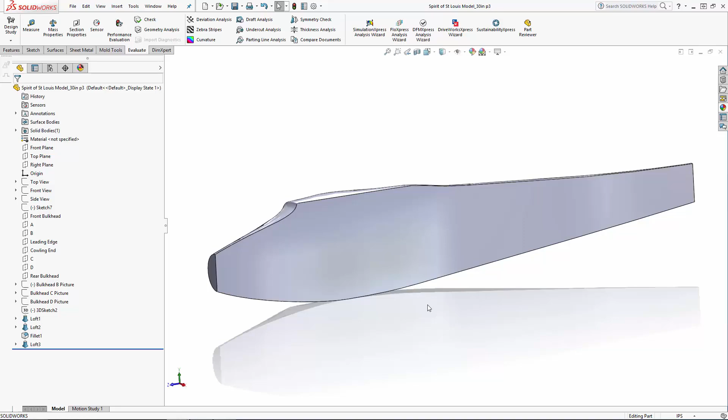Let's split this body into 3 parts. We can do this with a simple line sketch. So let's sketch on the side face of the fuselage, and I'll just sketch 2 vertical lines, one snapped where the cowling terminates and another dimensioned 4.875 inches from the first line.

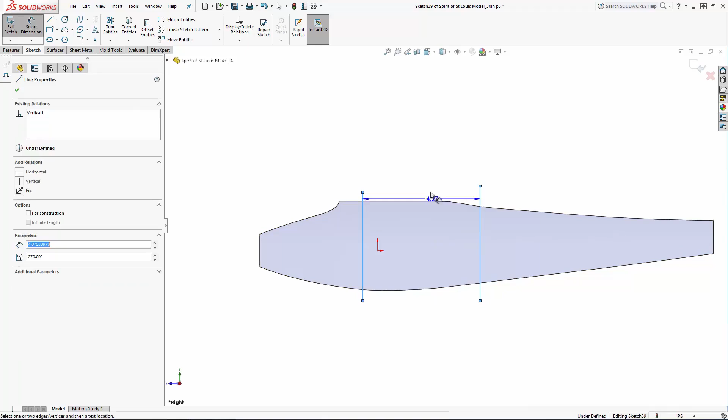With the sketch highlighted, navigate to Insert, Features, Split, and check the boxes next to the bodies you'd like to split. And we'll make sure the Consume Cut Bodies option is not checked.

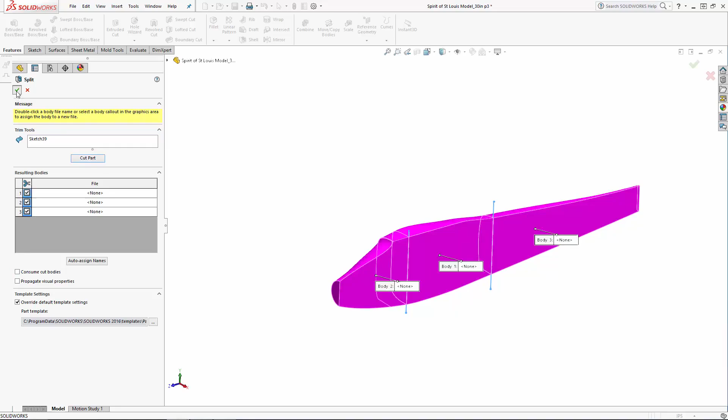Now we can hollow out the center body using the Shell tool. Let's hide our other 2 bodies and navigate to the Shell tool in the Command Manager. I'm going to set a wall thickness of 1/8 of an inch, and on the model select the faces I'd like to remove. In this case, the 3 flat faces. And hit the green check mark to complete the operation.

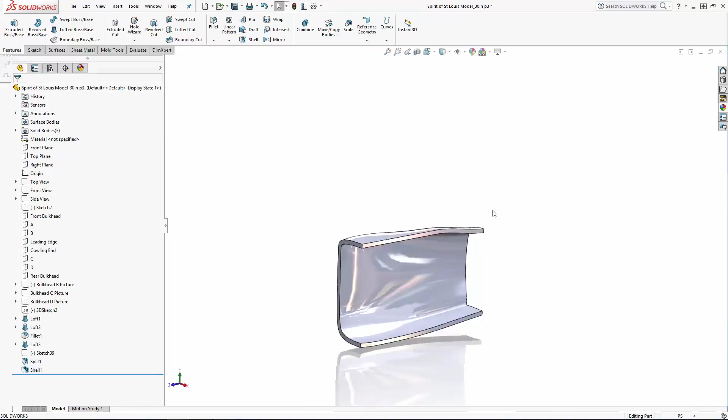Now let's recombine the bodies by going to Insert, Features, Combine, or just select the Combine tool in the Command Manager. I'll ensure the Add option is selected under Operation Type. Select my 3 bodies and click on the green check mark to combine the bodies.

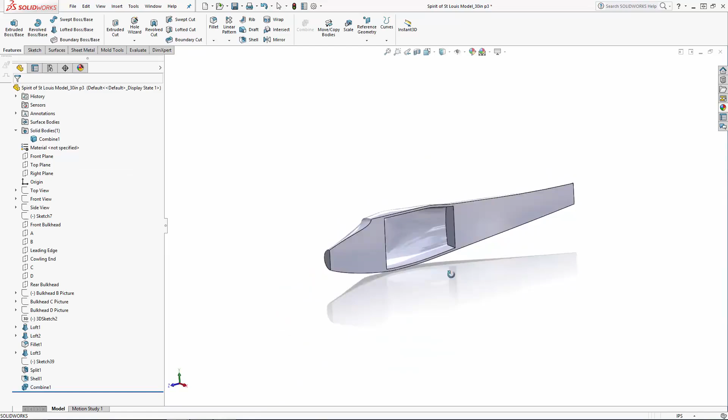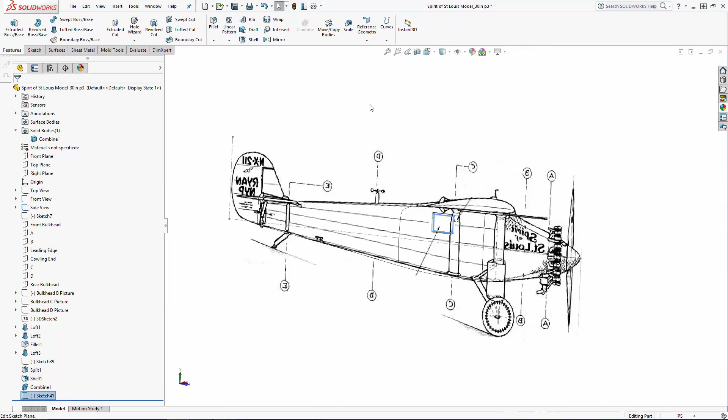Now let's cut out our window using a sketch on the right plane. I'm going to unhide our side view image to sketch on top of and sketch a simple rectangle. Navigate to the Extruded Cut tool and we'll do a simple extruded cut through all.

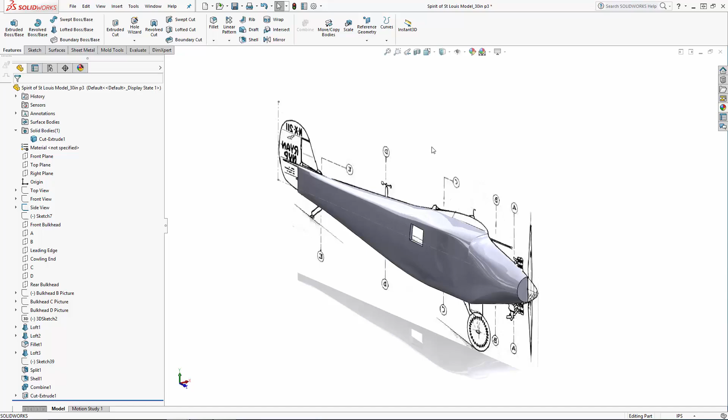Now we are ready to add in this half of the wing. Most aircraft have dihedral built into the wings, that is, they angle upwards slightly for added stability of the aircraft. But the Spirit of St. Louis is built with a flat wing, which is somewhat unique. So we can simply do a straight extrusion of this airfoil shape.

We'll leave the side view image showing and sketch our airfoil shape on the right plane. Let's use a few simple splines to sketch the airfoil, using the imported image as a visual guide.

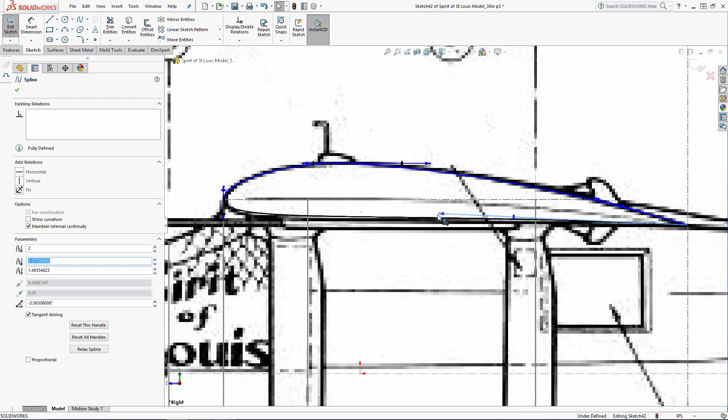I'm happy with the shape of this airfoil, so I'll extrude this just up to where the wingtip starts. In this case, 14 inches.

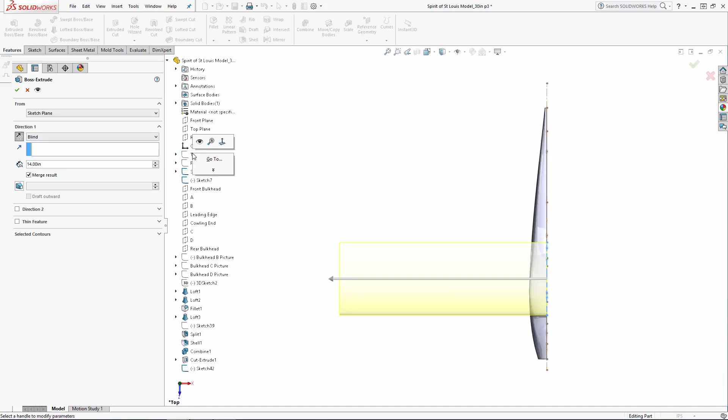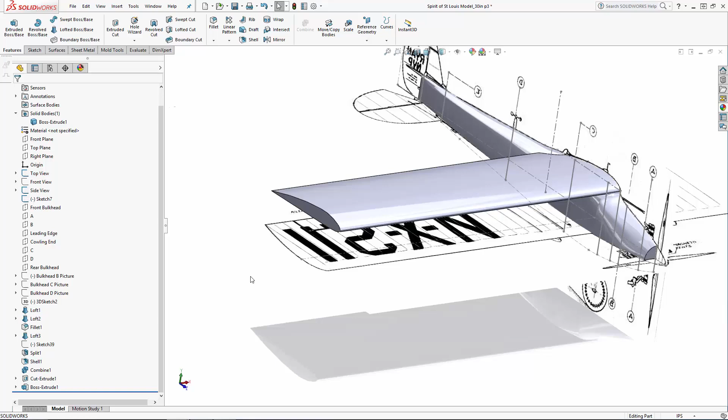We're going to add our wingtip using the Boundary tool, but let's create a few profile sketches prior to entering the Boundary tool. I'm going to create the wingtip in 2 halves, and I need 3 profile sketches, 2 on the face of this wing, and 1 perpendicular to the face.

Let's first create a construction line on this face snapped to the front and rear points of the wing. Use this line to create a construction plane perpendicular to the face of the wing.

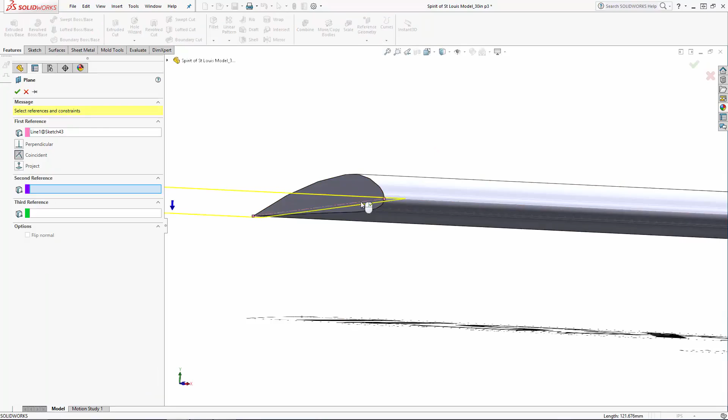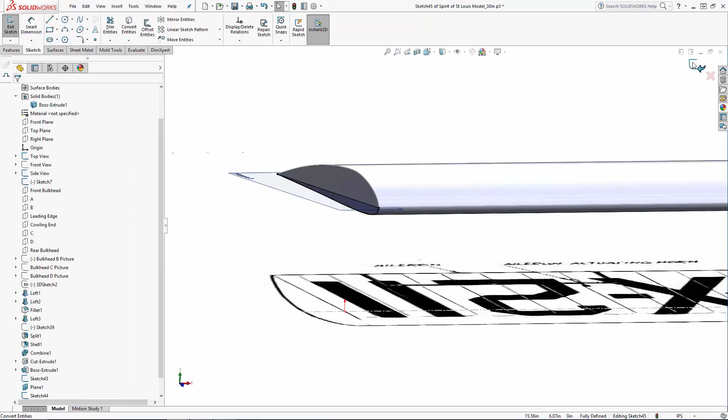Sketching on the wingtip face, I'll use Convert Entities to sketch 2 profiles in separate sketches. I'll draw the third profile sketch on the perpendicular plane we just created, using the top view image as a guide.

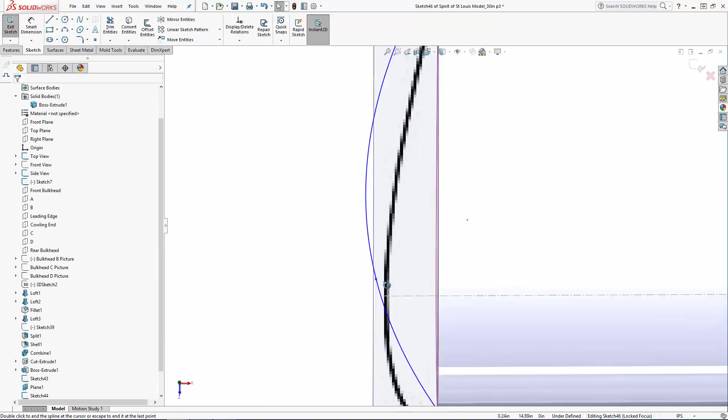And I'll set a few constraints to ensure this wingtip blends in nicely with the wing.

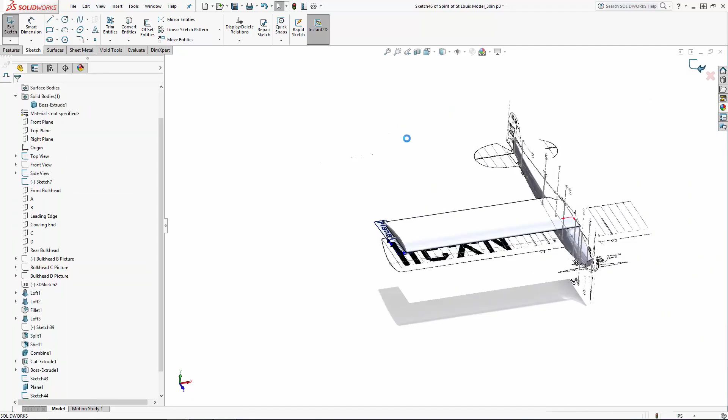Now we're ready to create our boundaries. In the Command Manager, select the Boundary Boss/Base tool. Under Direction 1, we will choose our top profile, and then select the horizontal profile. You'll notice in the initial preview that this will create an angular boundary, but we can control the shape of this wingtip without having to use guide curves.

For each profile, you can use the drop-down under Direction 1 to control how the profile interacts with any intersecting planes or faces. These options will apply various tangency constraints to the boundary. With any profile that interacts with adjacent faces, such as with this top profile we've chosen, you have several options to constrain how this portion of the boundary behaves.

You'll see the option for direction vector, where we can choose an entity such as a plane to get a tangency constraint, or we can simply choose normal to set this portion of the boundary normal to the profile's sketch plane. You'll also see tangency to face, which makes the adjacent faces tangent at the selected profile. And there's the option for curvature to face, which applies a smooth, curvature continuous surface at the selected profile.

Since my main wing is a straight extrusion, I'm going to use the normal to option to blend the wingtip. And we can adjust the tangent length to control the amount of influence these tangency constraints have.

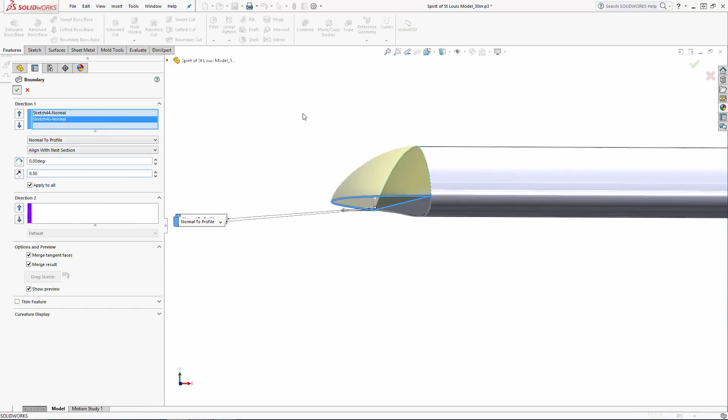Because our horizontal profile doesn't interact with any faces, only the direction vector and normal to options are available. I'll choose normal to again and set my influence amount. There we have a nice rounded boundary.

I'll repeat this operation for the bottom half of our wingtip. Notice you have the option to boundary to faces, as I'm doing with this horizontal face, rather than needing to use only profile sketches.

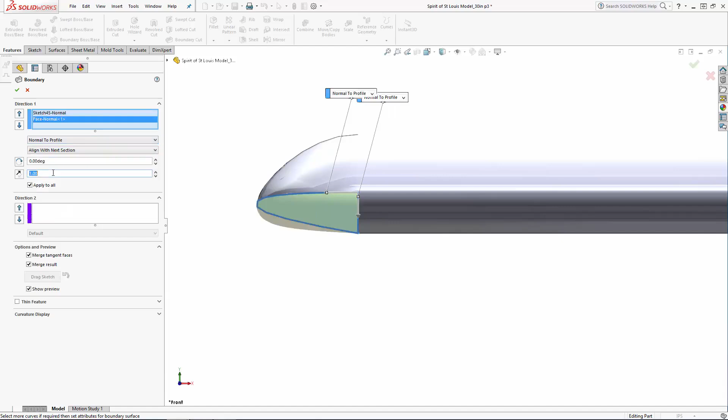From this front view, you can really see how applying these tangency constraints affects the shape of the boundary. Because we've applied these constraints, we get a nicely blended wingtip.

Before extruding the tail stabilizers, I'm just going to blend this wing into the fuselage using a 0.1 inch fillet.

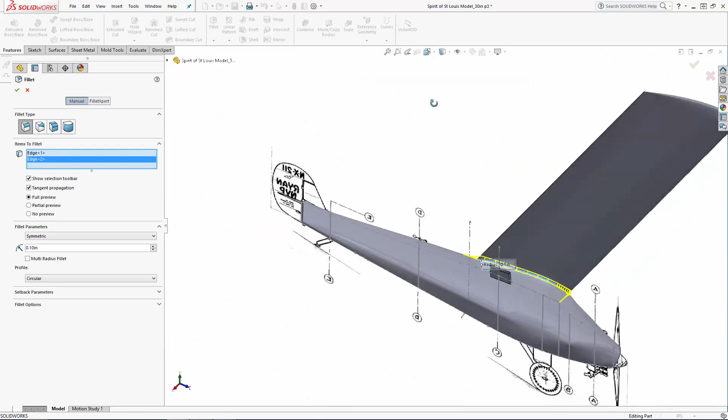Most aircraft's horizontal and vertical stabilizers are built with an airfoil shape just like the wing, but for this 3D printed version of the Spirit of St. Louis, I'm just going to create these tail pieces using straight extrusions.

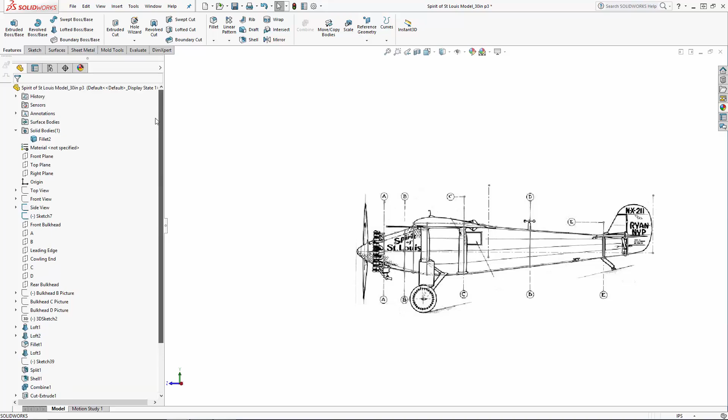Let's start with the horizontal stab. First, I want to create a flat spot in the fuselage for me to sketch on. So let's sketch on the right plane and use the side view image as a guide to cut away a portion of the fuselage.

Actually, rather than use the extruded cut, I'm going to use the split tool again, as I want to keep this portion of the fuselage to recombine later.

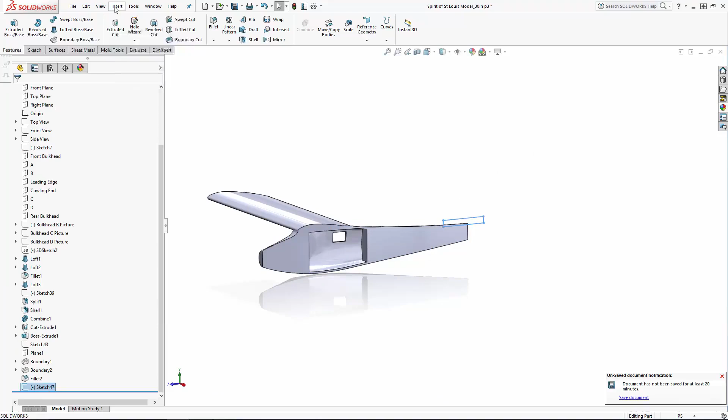With our new sketch highlighted, navigate to Insert, Features, Split, and click on Cut Part, and choose which of the resulting bodies you'd like to split. You have the option to choose just one of the resulting bodies and keep the Consume Cut Bodies option selected, but in this case we want to keep both bodies, so I'll turn off Consume Cut Bodies, and I'll hide my split body.

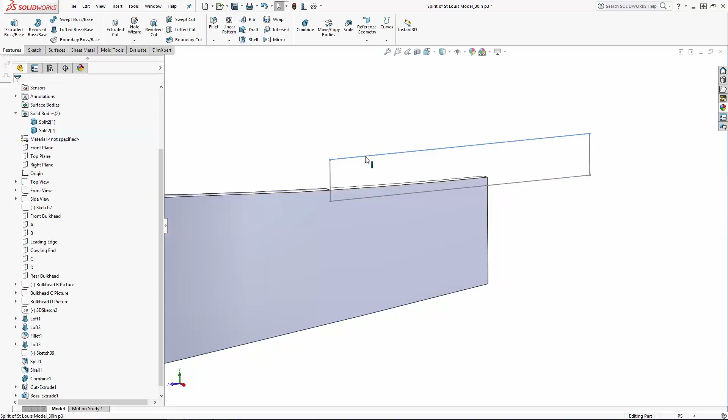Now we are ready to sketch on this new horizontal face. I'll unhide the top view image to use as a guide for sketching the horizontal stab shape, using a series of lines and splines.

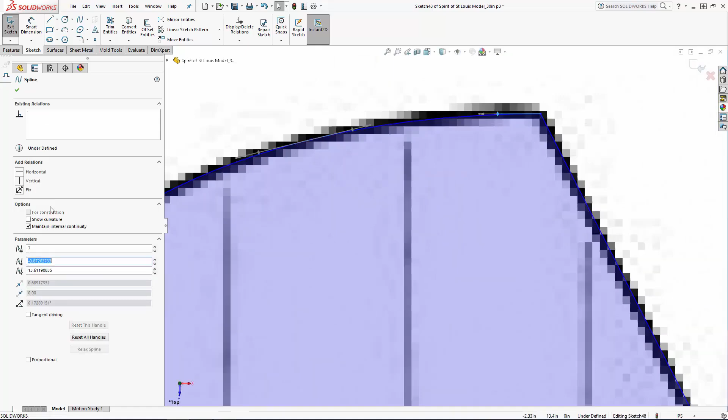Let's extrude this 0.1 inches. And I want to turn off merge result so I can split the elevator from the stabilizer and apply fillets to the new bodies.

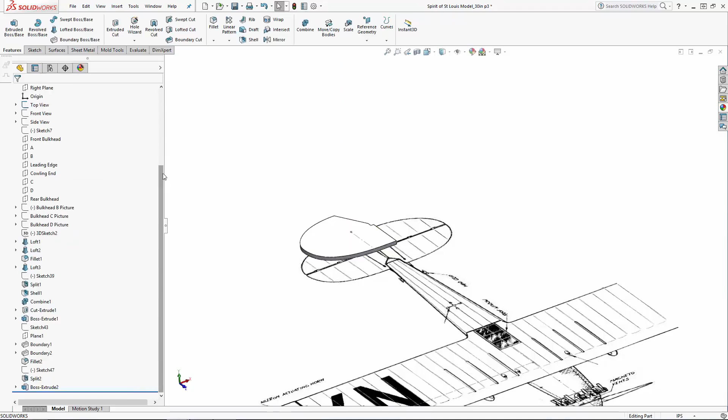Now I'll just apply a 0.075 inch fillet.

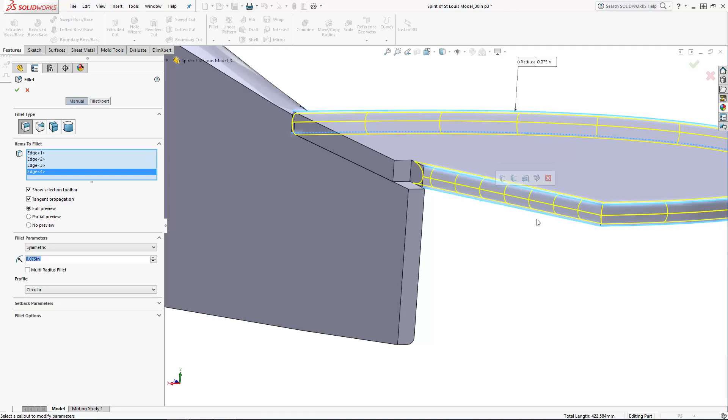I've shown you how to use sketches to split bodies, but you can also use planes to apply a split. Let's navigate to Reference Geometry, Plane, and select this small face where the elevator and horizontal stabilizer connect. And I'll set the offset dimension to 0.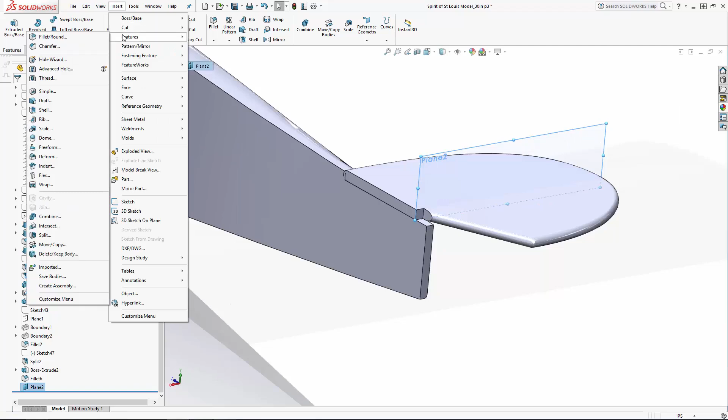Again, under Insert, Features, Split, this time I'll select the new plane as the trim tool and choose the bodies I want to split, turning off the Consume Cut Bodies option once again. Now I'll just apply a 0.0675 inch fillet around both of these new bodies.

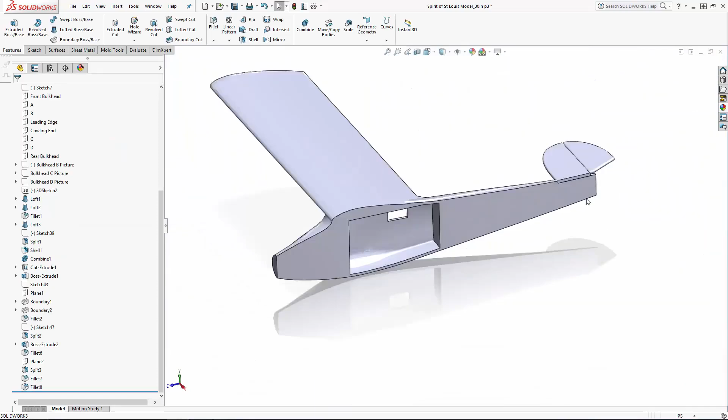To wrap up this portion of the series, let's extrude our vertical stabilizer and rudder. This time I'm going to sketch them separately rather than split the body.

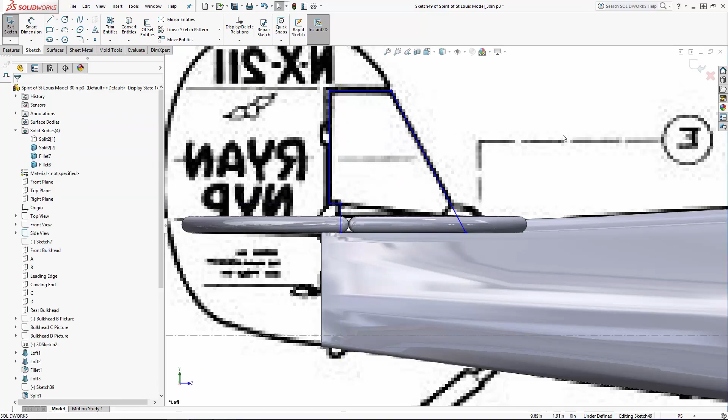When extruding the vertical stabilizer, I'll leave Merge Results on, and under Feature Scope select only the horizontal stab to combine the two bodies, so I can fillet the edge where they intersect. And I'll sketch the rudder.

Notice, when I'm using splines, I don't sketch in a ton of control points. Instead, I just sketch in a few control points and use the handles to come to the shape I'm happy with. This is best practice for splines as it helps maintain a nice smooth curve and it requires less computing power.

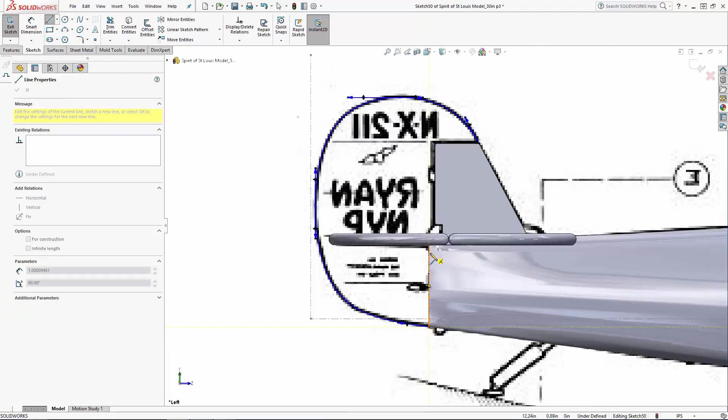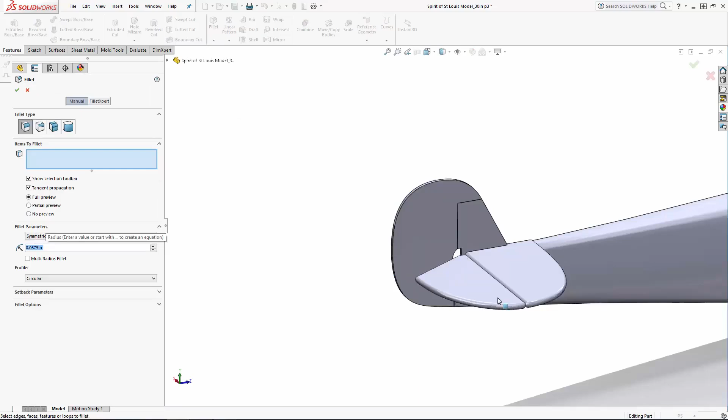So let's extrude the rudder, this time making sure Merge Result is not checked. And I'll apply fillets all around, similar to how I did with the horizontal stab and elevator.

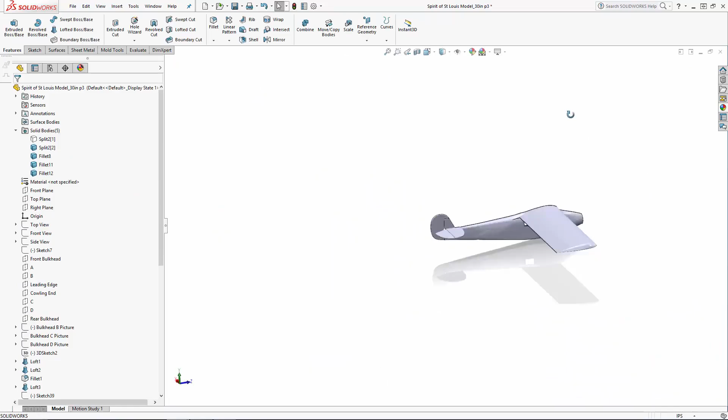Now we can combine the stabilizers to our fuselage. I'll leave the elevator and rudder disconnected, as I'll print those as separate parts and join them using hinges.

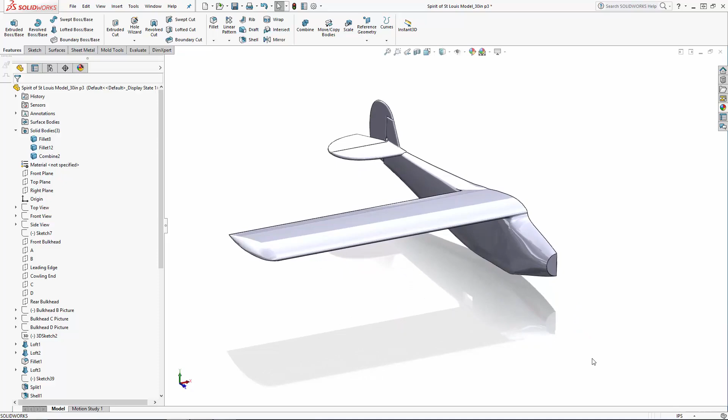Now we have our basic parts of Lindy's aircraft built in, and we're ready to move on to part 4 of the series, where we will use a series of sweeps to model the Spirit's unique strut structure. Stay tuned.